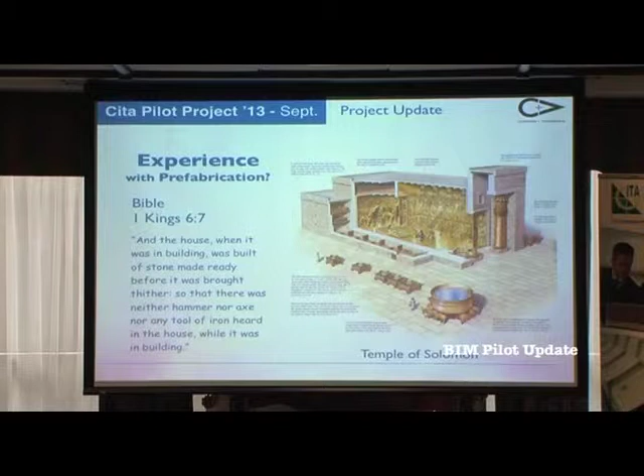A few hundred years later, Philip Gagan was employed at Laing in the UK. In the post-war period, they were doing a lot of prefabrication to satisfy the demands of the lack of housing. He gave us quite a good insight into the prefabrication aspects on pilot projects.

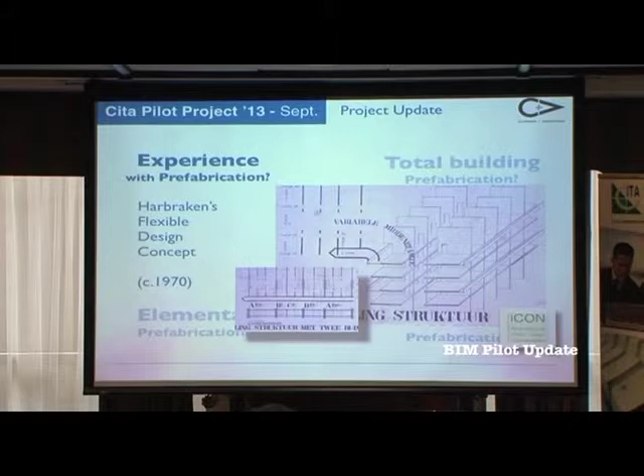His designs were heavily influenced by Harbraken's flexible design concept, which means that very often we have a notion that prefabrication gives you a very strict adherence to certain rules and limitations of architectural design, but it's still possible if you have an open mind.

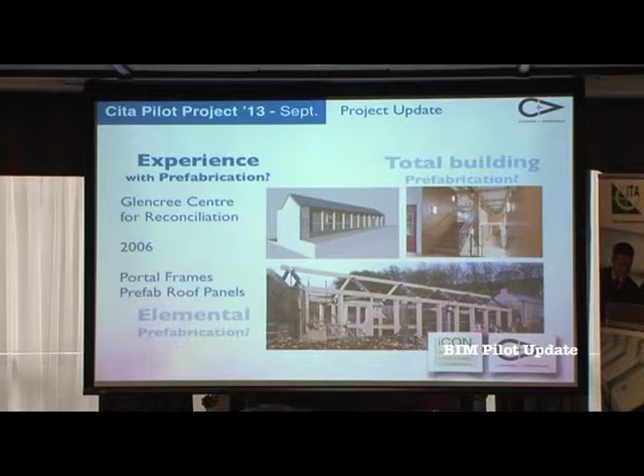We were also involved with ICON in a prefabrication project in Glencree, the Centre for Reconciliation, back in 2006. We did a full BIM model for that. And in our practice, we deal with prefabrication all the time with timber frame constructions.

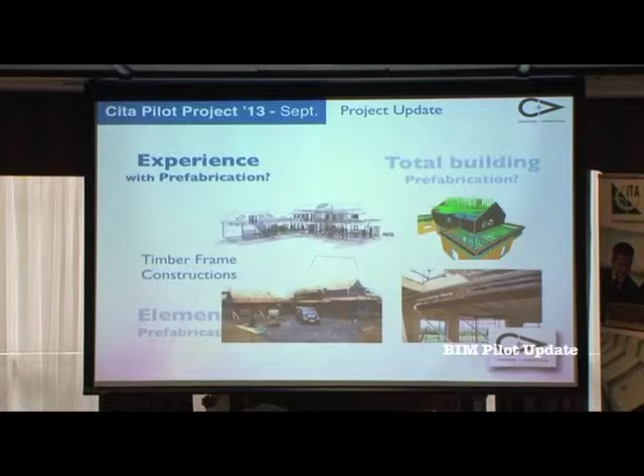This was actually 3D DWG, so we're hoping now that more companies will move towards the IFC platform or any other platform we can integrate. So for the pilot projects, what type of prefabrication are we talking about?

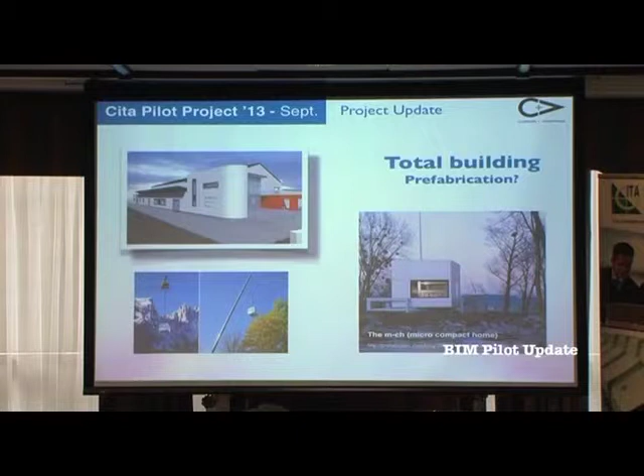Total building prefabrication wouldn't really be suitable, but it does exist. You can see here the micro compact home, which is fantastic - built within a factory, pre-finished, and just craned into place, on a small scale of course.

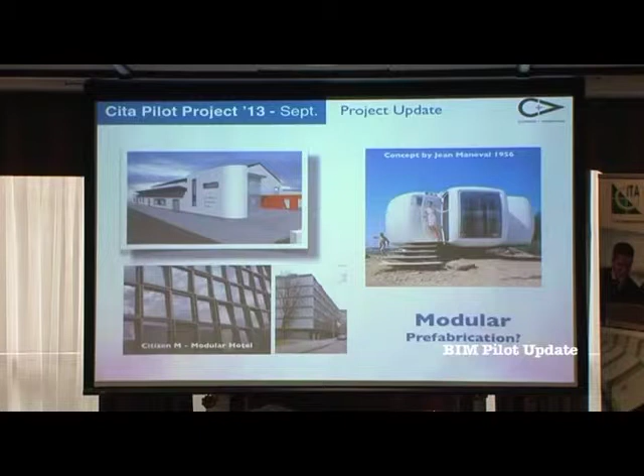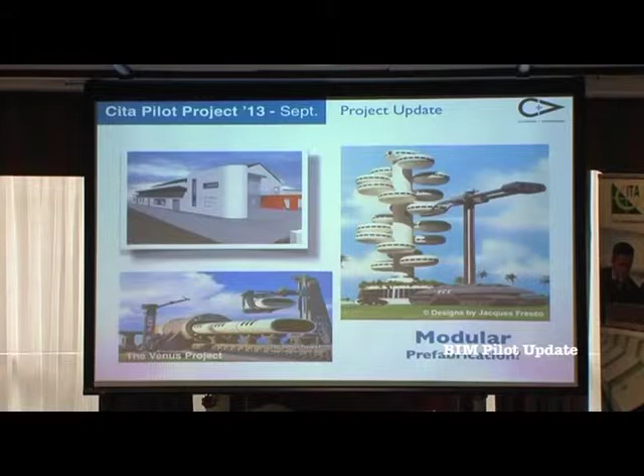You also have modular prefabrication in relation to a futuristic approach, where they even print and prefabricate the units by extrusion on-site, close to the site. We may get there as robotics improves over time.

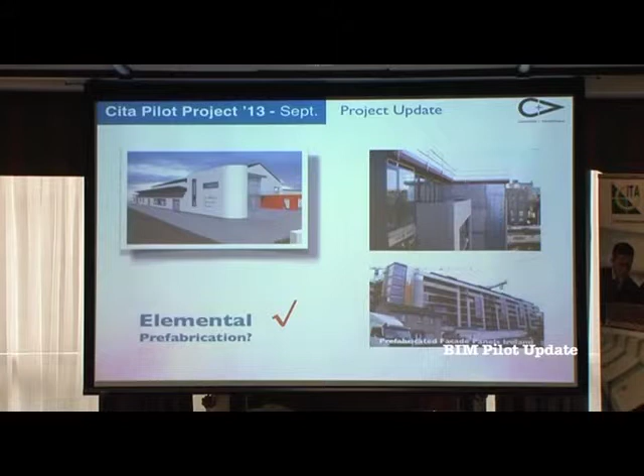But in terms of the pilot project, elemental prefabrication is the most relevant. We're talking about slabs, roof panels, stairs, and steel structures.

So we had a few workshops online to see which way we were going to go. We had a few sound issues at some point, and that's where technology doesn't always work. So at some point we had to resort to sign language - it doesn't always work, but we still got our ideas across.

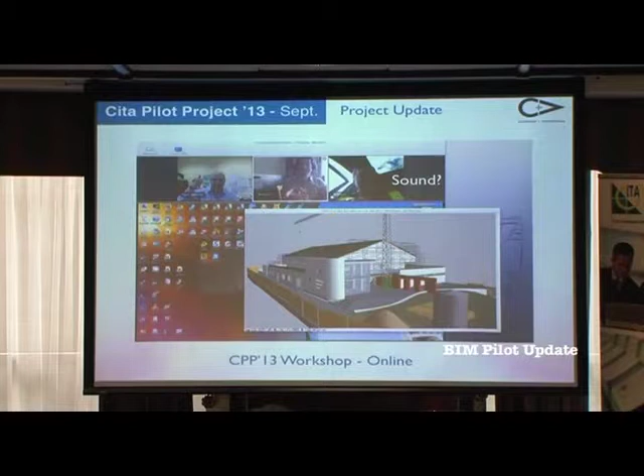So we decided to share the model, and we had a series of IFC files. We combined them all into a Tekla BimSight as a federated BIM model, so we can turn layers on and off and check for clashes as well. It's very easy to use, and it's a free app - it looks like we're doing a promotional presentation for Tekla today, but it is a free tool, so I'd really encourage everybody to check out its capabilities.

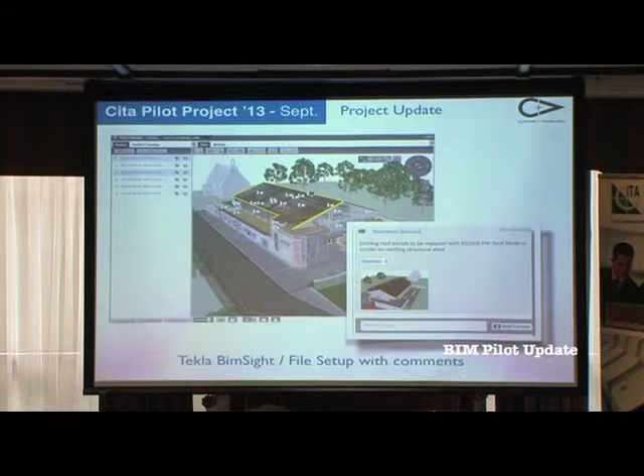In here you can also embed comments about the roof system. We sent this to Kingspan, for instance - we were saying you could use a KS1000 roof panel type, and they came back to us with a very interesting proposal, which we'll see after.

So we saved that federated model as a Tekla BimSight model with all the comments, and then we gave it to Solibri, Nugent Manufacturing, and Kingspan.

But before going there - since we were not successful in appointing a prefabricated concrete manufacturing outfit to look at the concrete elements - as an architect we're always wondering, could it be done for the wall, the main feature wall in front of the building? So this is just an example of how you could do it.

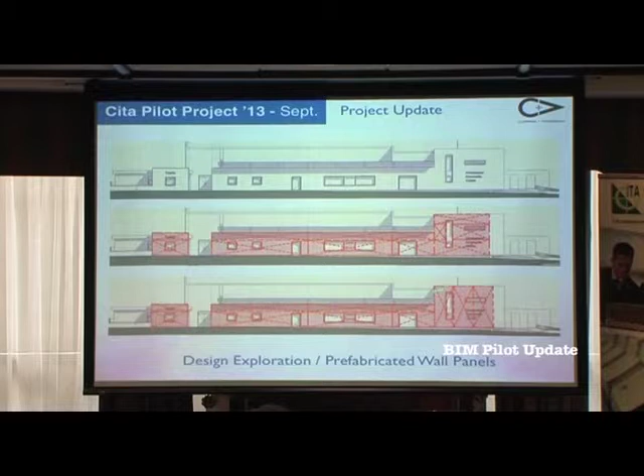The existing elevation here, the street elevation - this is just a subdivision of the panels, how it could be done. For those of you not familiar with the project, this is the initial design - this is an exploded view of how it could look.

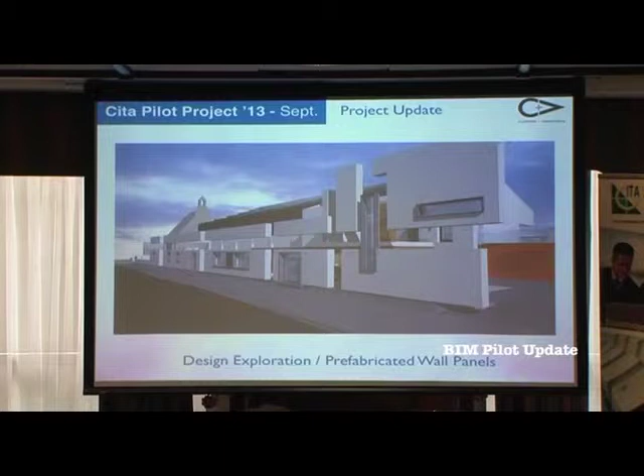Of course this panel will have to be cut in half - it all depends on transport options. Where are you going to do it? Prefabricated on site, or off site? These are considerations to address.

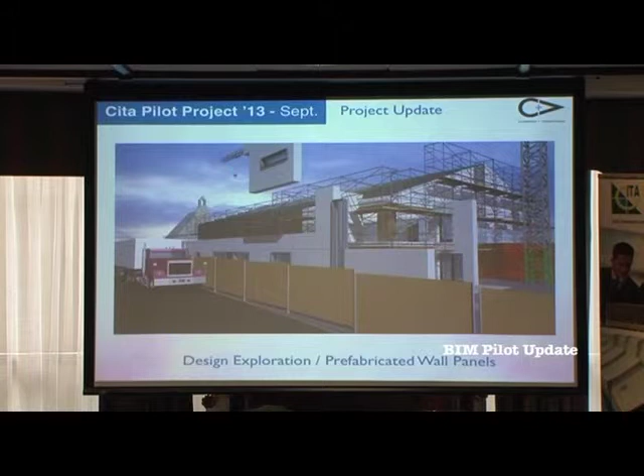Just a quick image to show how it could be craned into place - but you can see that crane is just not being used, a slight mistake there, but it gives an idea.

It's an architectural consideration to have. Prefabrication is all well and good - you have pre-finished products, factory settings, it's fantastic, we architects love it - but you have to consider the joints and all the rest. So if you design with that kind of prefabrication in mind, it's good to do it at a very early design stage.

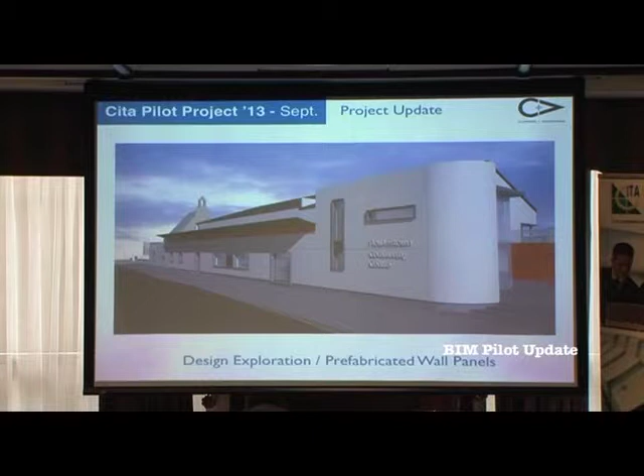So we sent all our files to Solibri to check for model integrity. We had a very successful workshop a few days ago with the whole team, all learning about how to do code compliance checking, and they had a look at our model. We were also involved in making the architectural model.

They came up with some issues, like classification issues that may not have been correct. There were also some issues with small stairs in some areas, but anyway, these were all minor issues. We have to say it's a very quick demonstration of the code compliance checking.

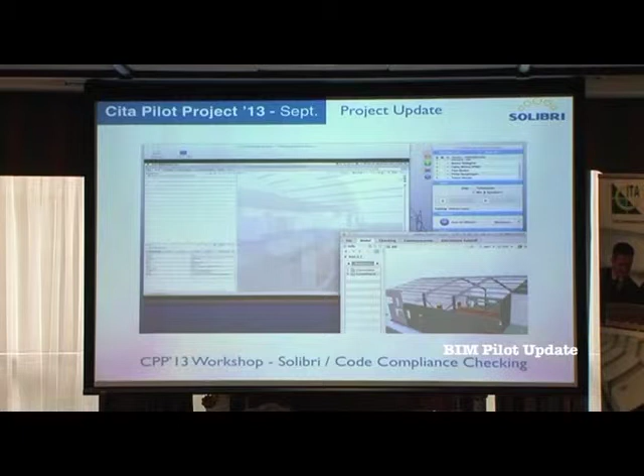I think that's hugely relevant, especially now with the new regulations coming into force, where you can check for compliance with Part M or any other building regulations, which could be automated quite easily in the office using Solibri, or I'm sure there are other tools as well.

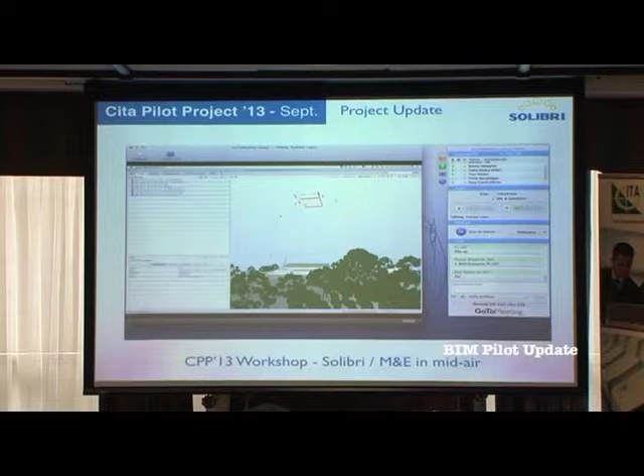There's another issue there, like a file - the M&E file actually. They notified us that it's slightly in mid-air, slightly too high above the building, and indeed when we assembled the building it was 80 meters offset. We could fix it in Tekla, but it's very important, and that should be part of the BIM implementation plan - that everybody issues proper files with proper project origins.

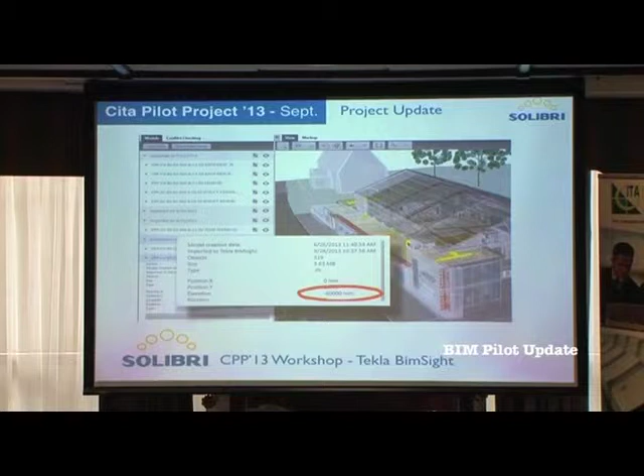So now I'm going to hand over to Paul, who will speak about Nugent Manufacturing's input.

Thank you, great. I've been asked to speak on behalf of Pearson Van and Nugent Manufacturing, just through their workload. A little bit first about Nugent - they were founded in 1999 to manufacture structural steel, secondary steelwork, balconies, fire escapes, a whole range of steel structures. They started with 3 employees and grew to over 4 million a year, and over 30 employees.

They've done work on the Aviva Stadium, Microsoft, and also work for Diageo at the moment - if you're down past St James's Gate, you'll see the steelwork there, that's them. This is also a structure they did in 2011 for the Chelsea Flower Show - they did the steel fabrication work for Diarmuid Gavin and his gold medal win there.

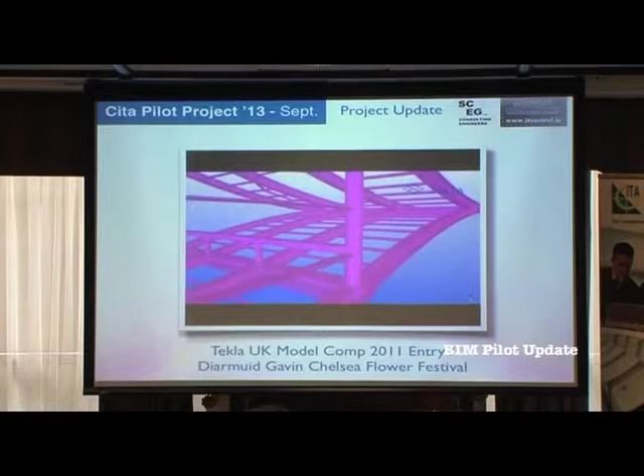Pearson Van's background is as an apprentice structural fabricator who's moved into detailing, and I think that's great. You have someone who's able to model, but also has an appreciation of real life and what you have to do.

So for the pilot model, we got such a huge amount of data, it's impossible to present it all here, and a huge amount of files. But these are the type of outputs, a full schedule of all parts and pieces that would have come with the model.

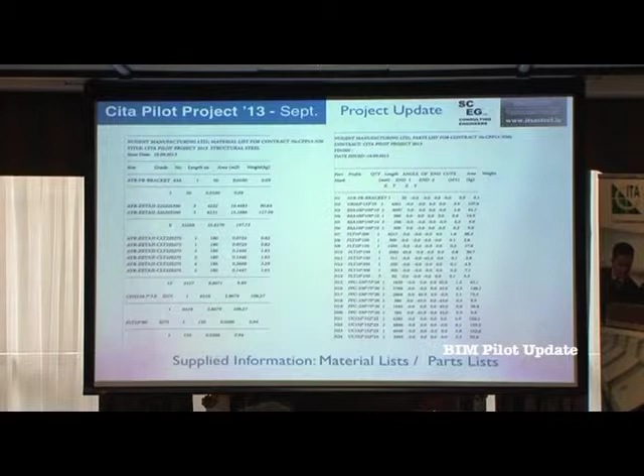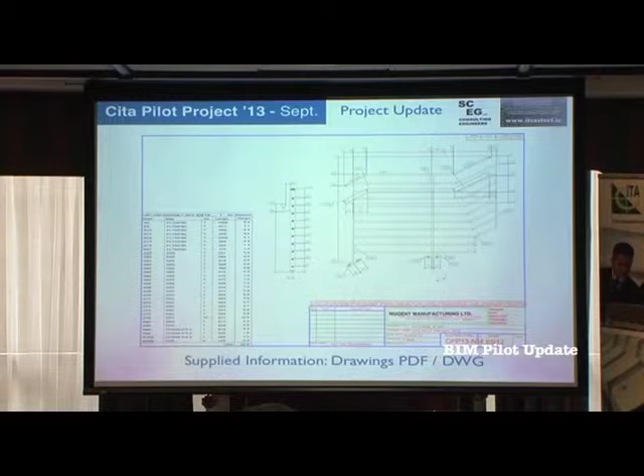This is an example of the stairs to the side, broken down to pieces. If you look at the key elements for health and safety, particularly manual handling, how heavy particular pieces are, and how you're going to crew that, not just with craneage.

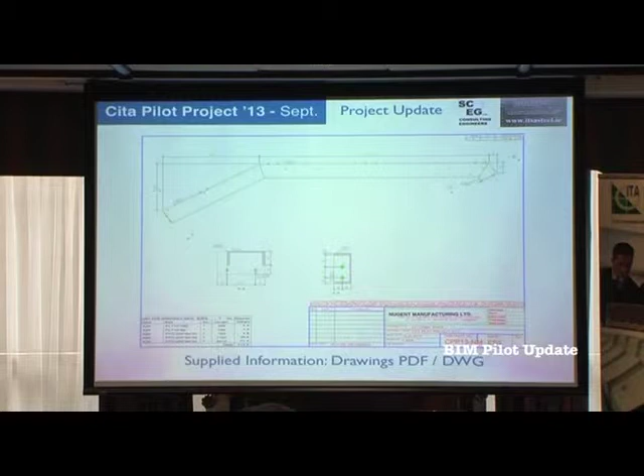So again, typical fabrication drawings, pretty much spitting straight out of the model and annotated straight out of the model, to result in the numerical control files for the CNC machines. These are DSTV standard, a German steel construction association standard. I like these formats because they're very simple - to emphasize the point, it's like binary for computers, very, very simple. For machine manufacturers, they need a very simple format.

So while on the face of it, all these technologies are very graphic, 3D, and look great, at the bottom line, this is the kind of real stuff that you want.

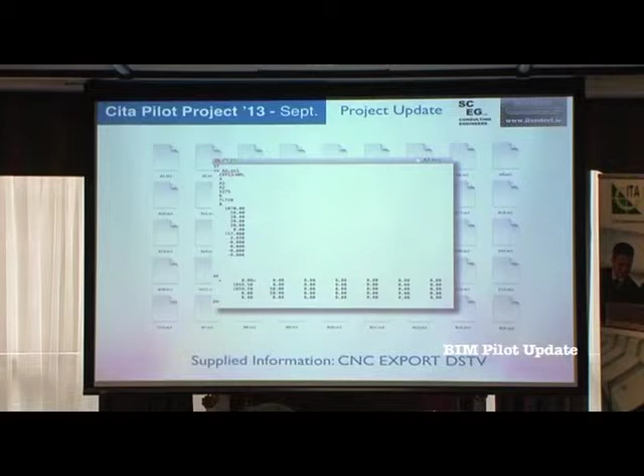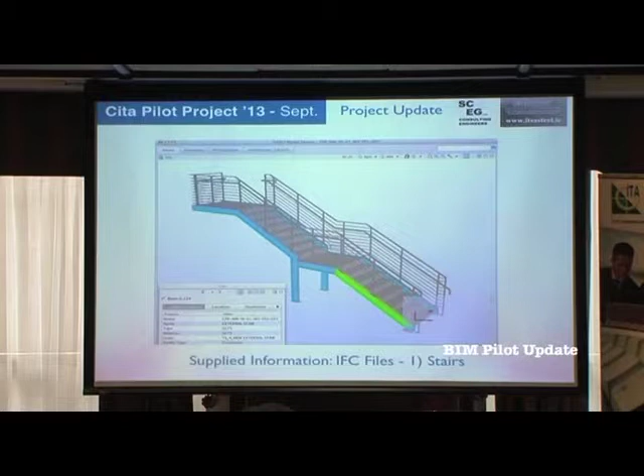So just taking the stairs, for example, that's a Tekla export. I've been using Tekla since about 2004, version 11, and it would have been unusual in that respect in Ireland. This is a Tekla export to IFC, just of the stairs, to show the quality of the output, with different aspects and all the information associated.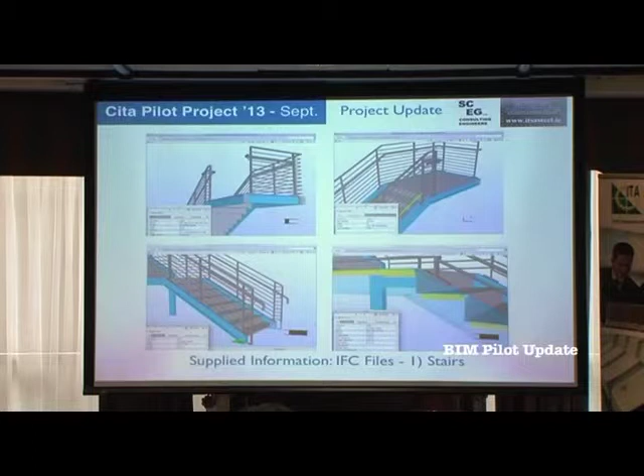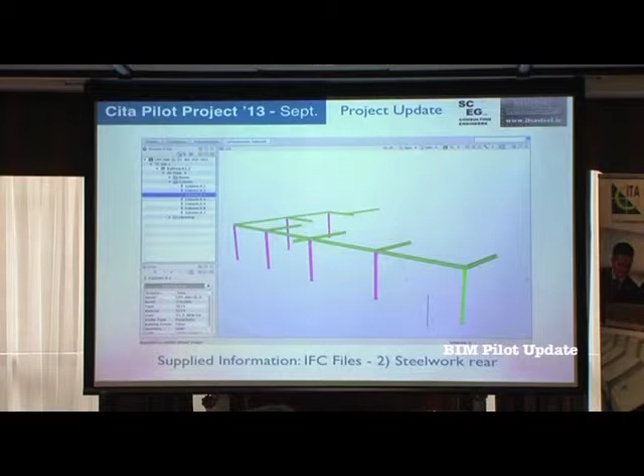We have the bolts switched on in this case. Again, some of the steel framing around the single-story podium at the rear. The pilot project, unfortunately, from a structural point of view, wasn't really too exciting, because there wasn't that much to it. But we're hoping it will show some of the principles involved.

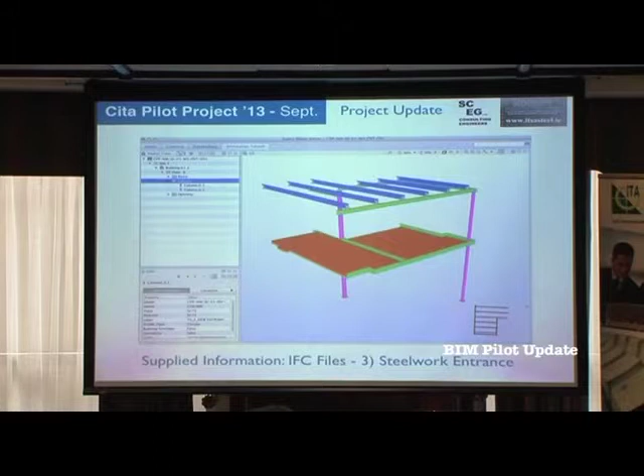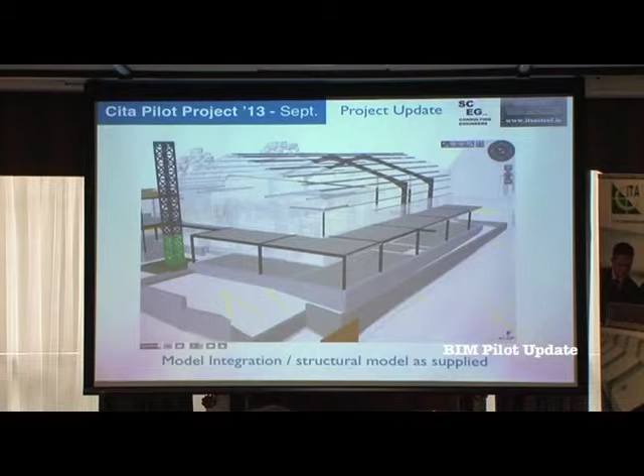This is a two-story section to the front, and Piers has used some purlins, which becomes relevant in the middle. So taking that to Tekla BIM site, this is the structural model in Tekla BIM site. We had some precast units on some basic steel framing, integrating the Tekla model over it, as you would have seen last time we presented.

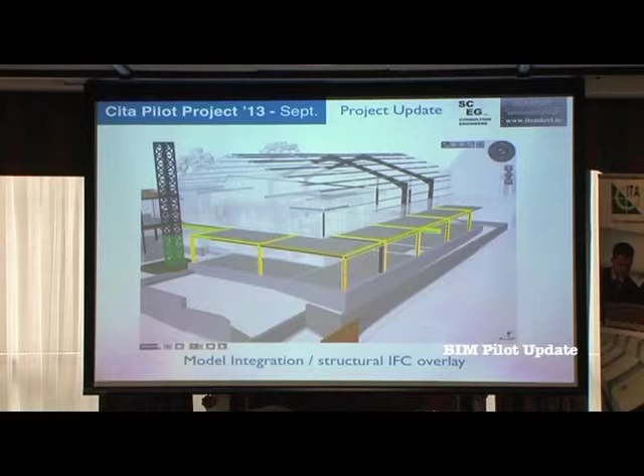You'll see straight away - I didn't appreciate this at first - but you can see the Tekla file, the IFC file, was modified by the detailers to make the detailing process much more efficient. So that's the Tekla model switched on, and you can see that has an impact - when a change is made, there's an impact on other trades.

So the precast slabs that we had - if the precast units and the structural steelwork were all integrated and associated, well, that maybe would have happened, but then who has control of all that? So this was all part of a back and forth, and obviously some of my slab detailing was a bit too overenthusiastic there.

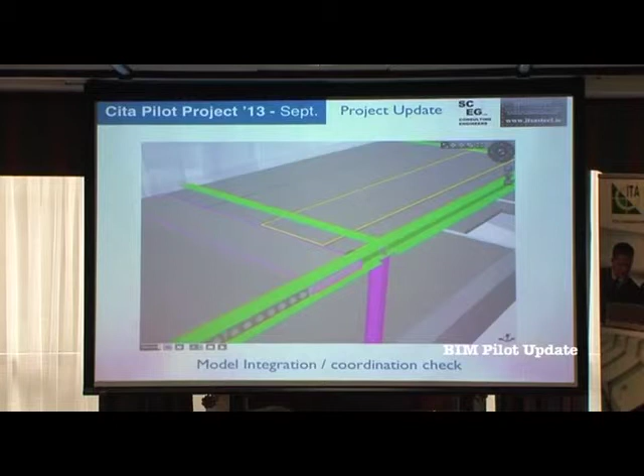So looking at the front section, again, this is the input from Piers. You can see he's chosen to use some purlins. We had a timber frame structure for different reasons, because it's just a pretty small section of roof.

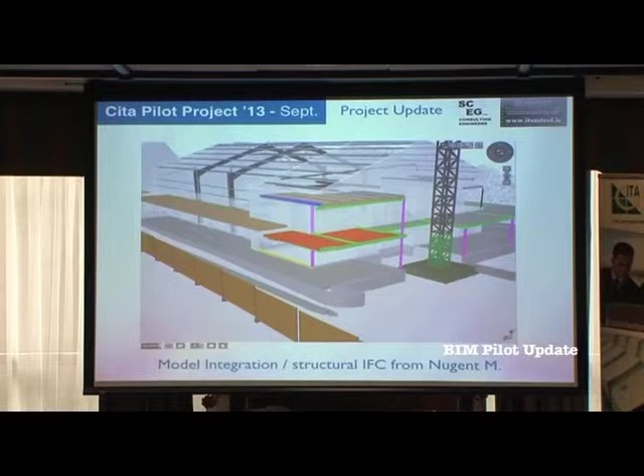In these type of projects, because the scale is so small, you're nearly at a halfway point about what's the best kind of structural solution, or what kind of builder might be using it. So again, a high level of detail - we have the bolts switched off in this one.

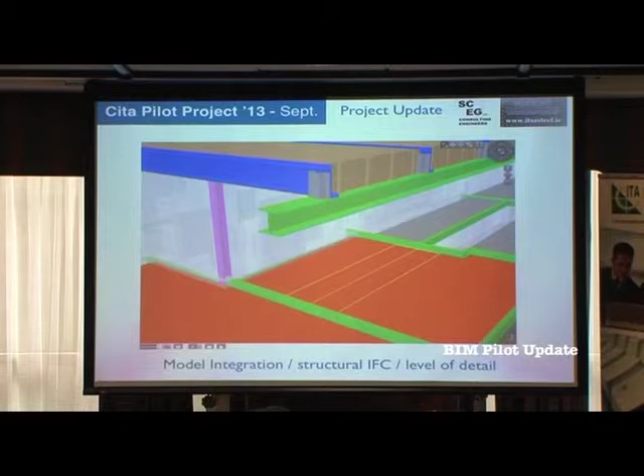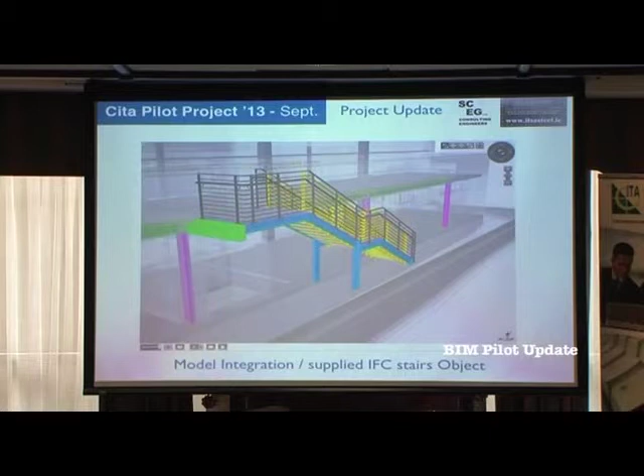And again, you can see really up close and personal with the model, and there's no end of shots. We said before that a picture speaks 1,000 words. A BIM model is effectively 1,000 pictures. So the highlighted section is actually the stairs object that would have been modelled originally in the original authoring tool, and then that's overlaid with the Tekla model. And again, you can see the quality detail.

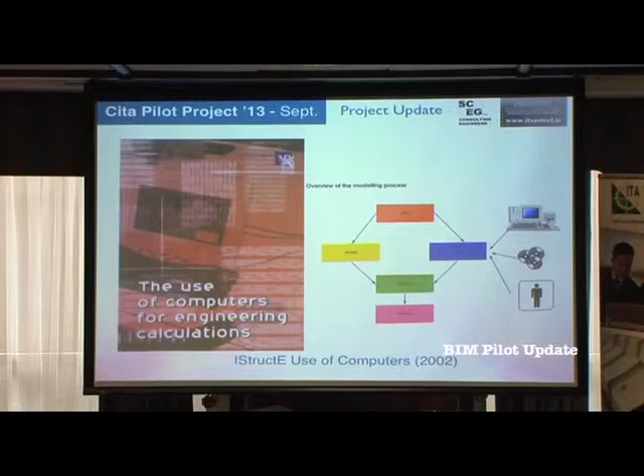I'm a member of the IStructE, and I'm the IStructE representative to CITA, and so I'd be remiss not to just highlight that there's a document there that we've had since 2002 about the use of computers in engineering calculations, particularly with respect to some failures that have happened because of garbage in, garbage out. So with all modelling, it's all about validation and verification of the model, whether that's a model for fabrication or a model for design or analysis.

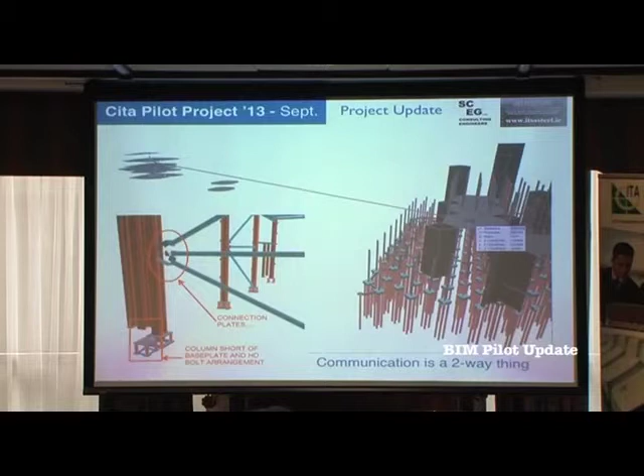I will say one thing about IFC. My experience of IFC has been actually very good. I haven't had too many issues, but I have seen issues like this, and if anyone has looked at IFC, they might have come across this type of thing where you can see obviously this is rubbish, but you get translation issues sometimes. There's 355 meters, the floor slabs are over here from here. But for me, I don't see this as a problem. I just see that it's about communication, and communication is a two-way thing. If you're going to pass information to someone, you have to give it to them in a format that they can interpret properly. Otherwise, you're effectively just dumping on them.

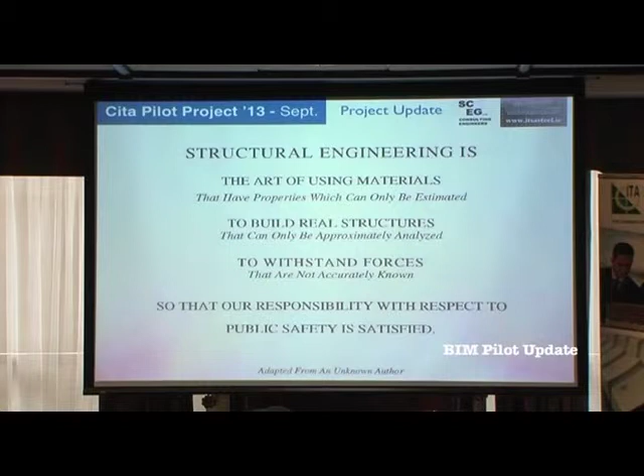And lastly, I'd say that's the reason I talk a lot about issues with the quality and the veracity of information. This is a famous, I suppose, description of structural engineering by an anonymous author. But it's really about, real life is different. Computer software can make everything seem to be perfect, and that's why the experience of the steel industry and also the precast industry, and also the likes of Kingspan, are really showing the way of what we need to be doing. But we need to keep it real. So I'm just going to pass on to Keith now again, and he'll be finishing up for us.

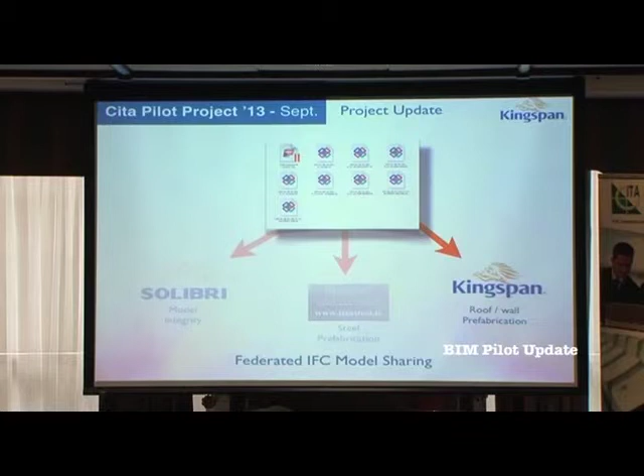Thank you. So I'll just quickly run through some of the steps that we've taken. Now, just in terms of the time we've had with this, it probably only came to us about 2 weeks ago, and we only had a day or less than a day to spend on it. But what we did was to look at the pilot model and selectively pick a few parts of the model to apply some Kingspan product to. I think we've got a combination of roof and wall panels as well as some of the Benchmark Karrier system we spoke about earlier.

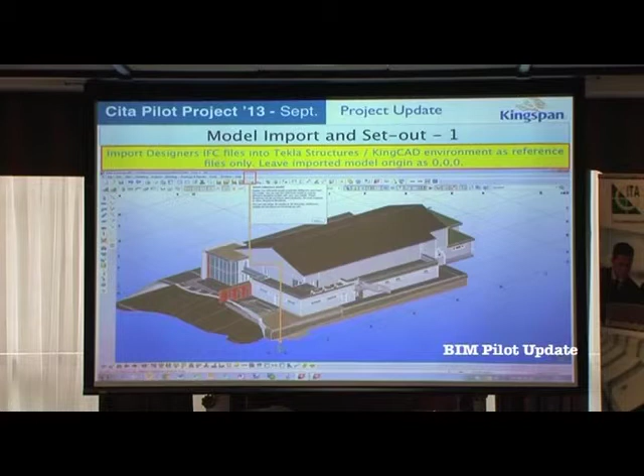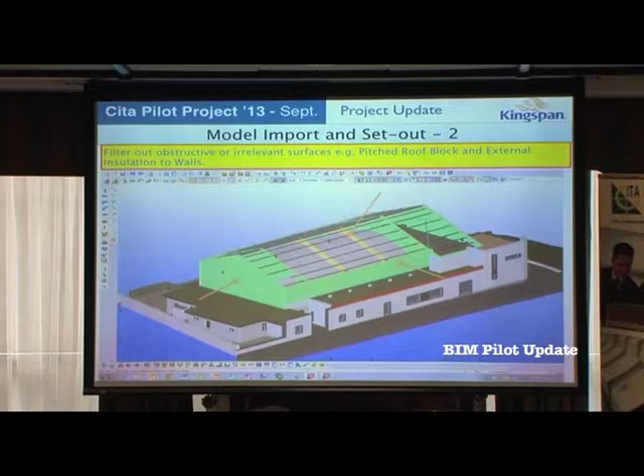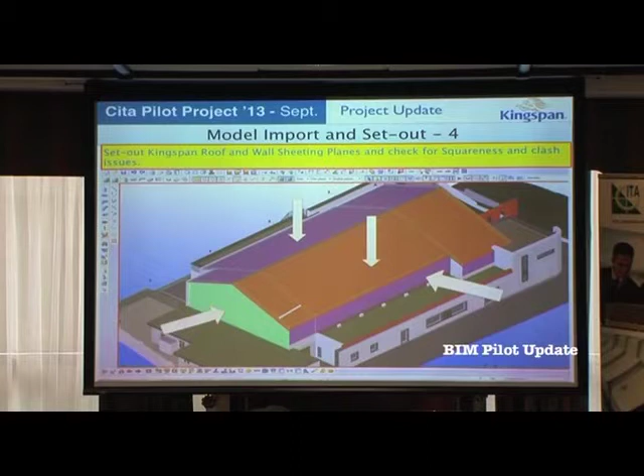So really in terms of the major steps, we imported the IFC model into Tekla Structures. The name we refer to that package internally is KingCAD. It's our extended version of Tekla Structures, so it has a lot of our macros and plugins in there, but they're reference objects or files only at that stage. There was a filtering out of any obstructive or irrelevant surfaces just to allow you to see what you need to see to apply the Kingspan product to the building. 2D elevations and plan views, and then we're into the setting out of the Kingspan roof and wall sheeting planes, checking for squareness and clash issues.

An example of an issue, and we've got a few here, and I guess these may be a consequence of the fact that it's a pilot project and everyone's faced with time constraints, but we do see this sort of stuff in the real world as well, and it links back to the question that was asked earlier. Is it a cultural issue? Is it a real issue? I think it's both, to be fair, and it should improve over time as people evolve and start to get to grips with what's required. But you can see here we had the modelled wall protruding through the roof plane, so obviously there's something there to be rectified by the designers.

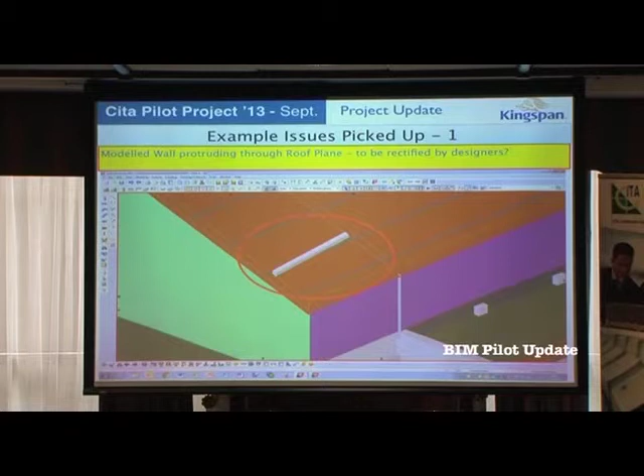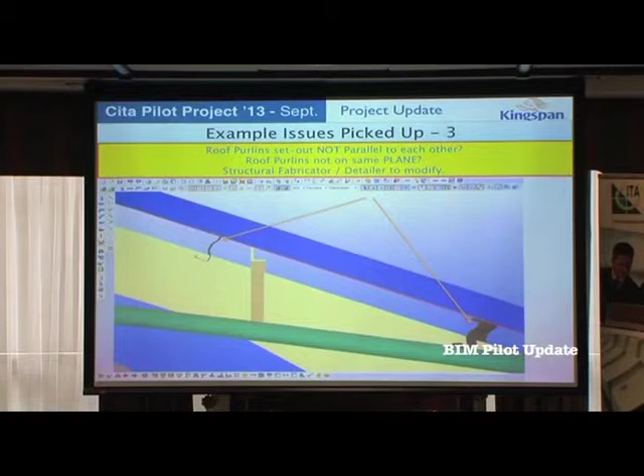Issues with the set-outs not being perpendicular, so you can see, I think, on the next slide as well, we've got issues here with the purlins not being lined up as well. So there's just a number of things which were needing to be corrected on the fly. Now, I guess in a collaborative scenario, you'd probably be doing the two-way thing and asking the owner of the model to correct those errors so that you then can continue, but we just took the view that for expediency we would just make the corrections and kind of get on with it really.

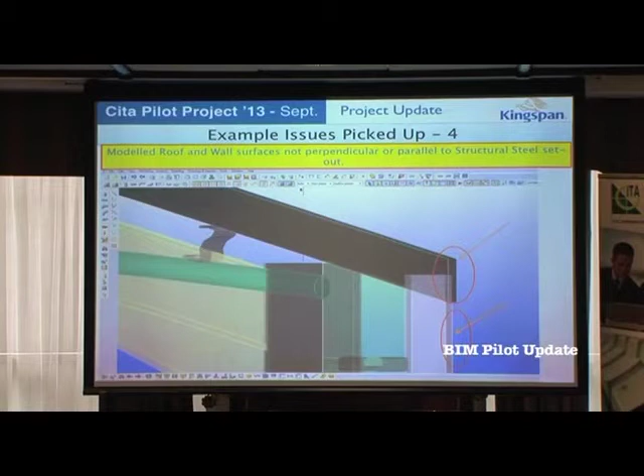So again, it's really just sort of snapshots of the stages we've gone through. Now this is really one of the many plugins that we have to the Tekla system, and you can see you've got a floating toolbar sitting above the main Tekla Structures application. A lot of tabs on there which then have numerous parameters, drop-down menus, etc. They're parametric, they're working in a very similar way to our SAP system, so it's variant configuration. If you choose a value for option A, that will then drive the next menu choices based on valid configuration, so it's applying business rules, engineering rules, etc.

So we can then sheet a roof and add roof lights in and gutters and flashings and stuff like that. Ultimately it'll produce the bill of materials or the material list that we were seeing earlier, and that can be uploaded either for quotation purposes or for sales order entry and then production orders, and then later still onto the production line side, the CAD-CAM end of things.

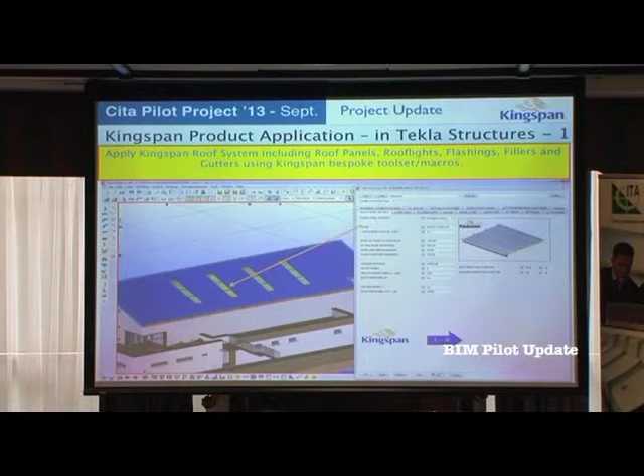So again, you can just sort of see tidying up of some of the components that are being added. So just making it, I guess, cosmetically accurate. I guess some of this stuff would be cut on site, so if you were to leave the model looking like it would be in the real world in terms of how long the products would be, you'd have things sticking off the end and stuff, and that might not look right for the design team or the client. So Martin, who did the modelling here, would tend to just go and clean it up, even though that would be cut on site, just to make it look right in the model itself.

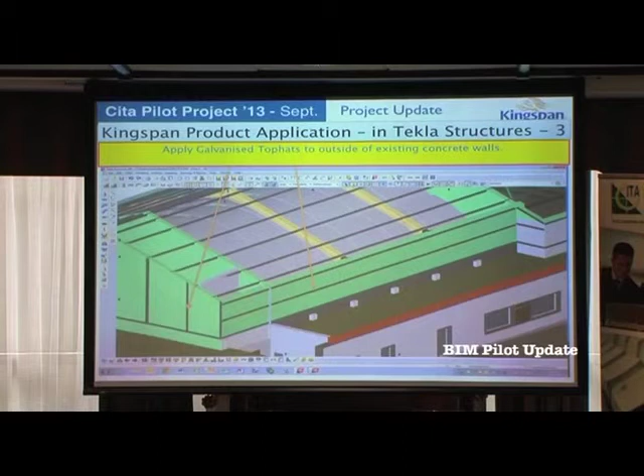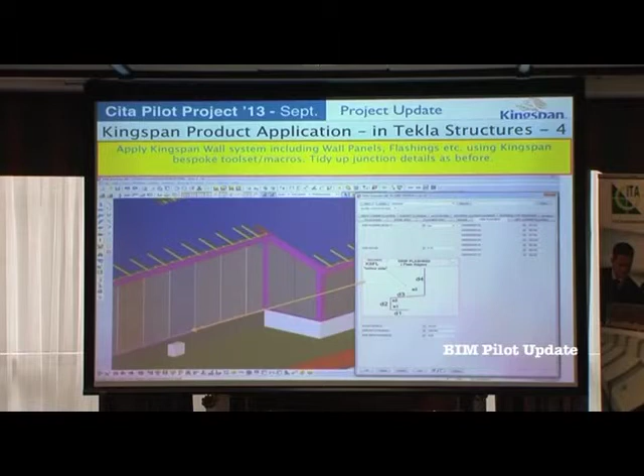And I guess the challenge for IT, and Kingspan as a business, is that obviously people want to push the envelope in terms of design, and that then leads to increased sophistication in the manufacturing process. Now, I think we can cope with that from a technology perspective, but we need to be given accurate information up front, really, and early involvement I think is key.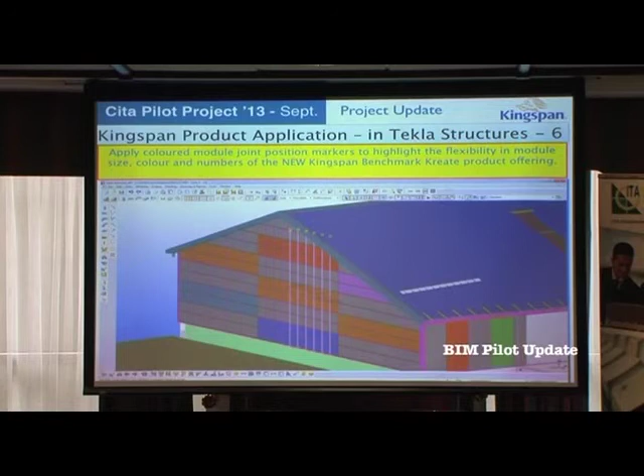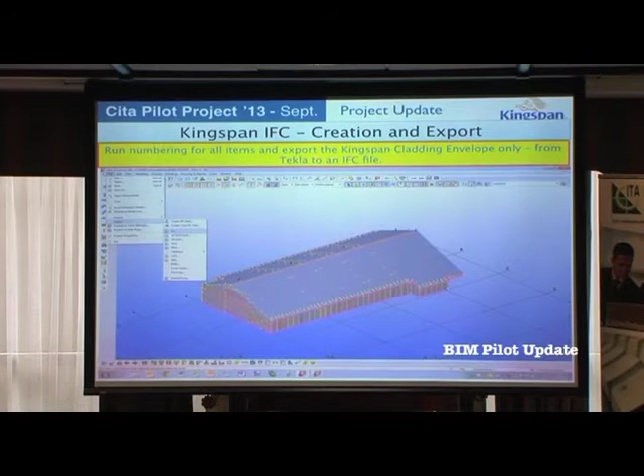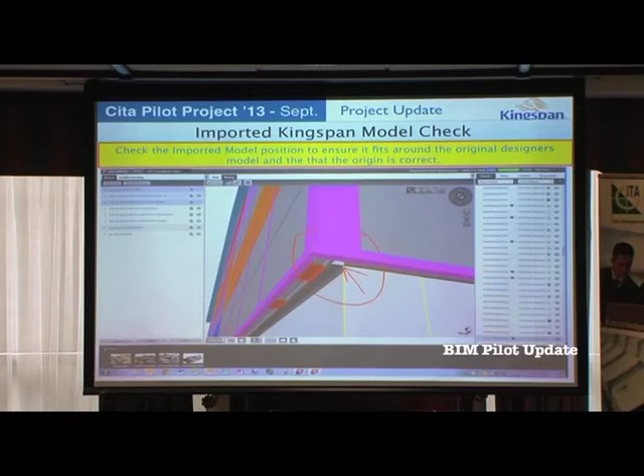At the back end of this, then obviously we're exporting the IFC model back to allow it to be included in the federated model, so that you can turn it on and off in BIMsight and see the Kingspan products that we've applied. And I think this was just checking the model origin, I guess, so that the different IFC models align to one another. So that's pretty much what we did in a very shortened version. Brilliant. Thank you. That's it.